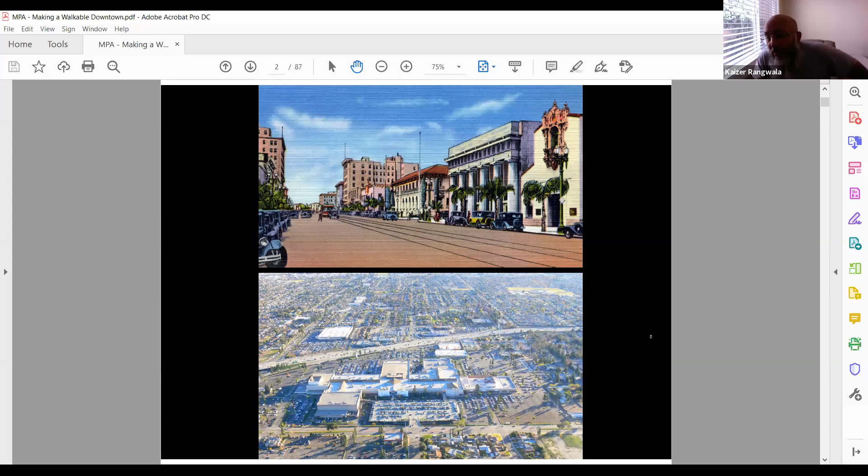Vinayak, can you go full screen so we can see more of the slide? Press Control L. Yeah, sure. Sorry about that. Is that better? Yeah, much better. Thank you. Okay, so sorry about that.

So, the choice of the downtown is really a privilege we all have, because the slide at the top reminds us that the great urbanist legacy that we've inherited is really one where there was just a simple logic of prioritizing 2 feet over 4 wheels. Not that 4 wheels were absent, but the 2 feet were just given more priority.

You can see this is a slide of old Pasadena in the 1920s, where there was a streetcar in the middle. People are crossing the street very, very comfortably. The street has parking on the side. The buildings are lining the street. All across the United States, there was a great tradition of these downtowns.

And systematically, legally, through policy, they were dismantled and replaced by the slide you see below, which is an exaggerated version, of course, but nonetheless a provocative one that reminds you how we transformed this paradigm to focus on cars, to focus on toxic landscapes that interiorized people into gigantic buildings, that inundated the landscape with hardscape for parking.

They were unsustainable because water couldn't percolate into the aquifer anymore, and created all kinds of unforeseen consequences whose effects we now know 60 years down the line. So there's no reason to belabor this point, but I think the essential point I'm trying to make is the choice of the character, quality, and performance of a downtown is a choice we truly have.

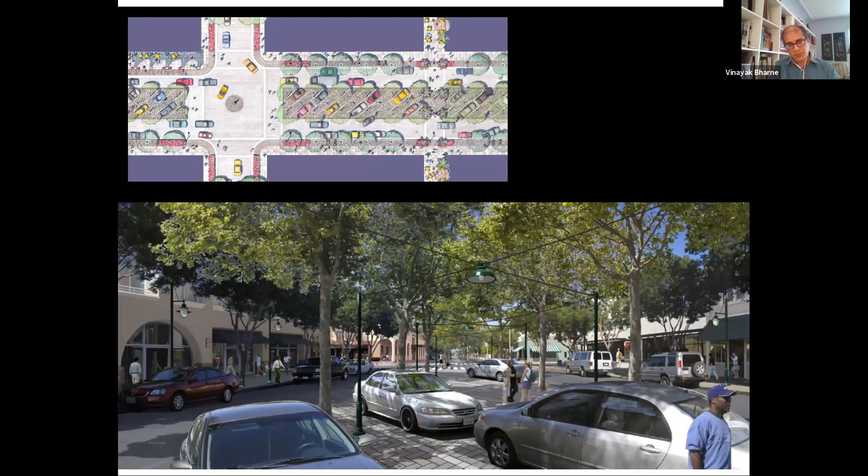We took the central 2 lanes of traffic, central 3 lanes actually, and paved it with pervious paving. We kept a 12-foot travel lane next to it on both sides, but instead of making the central zone purely a pedestrian zone, we actually striped it for parking, which could be parked on a normal day this way. We planted trees because it's an arid environment. You already have this condition in your median and the sidewalks.

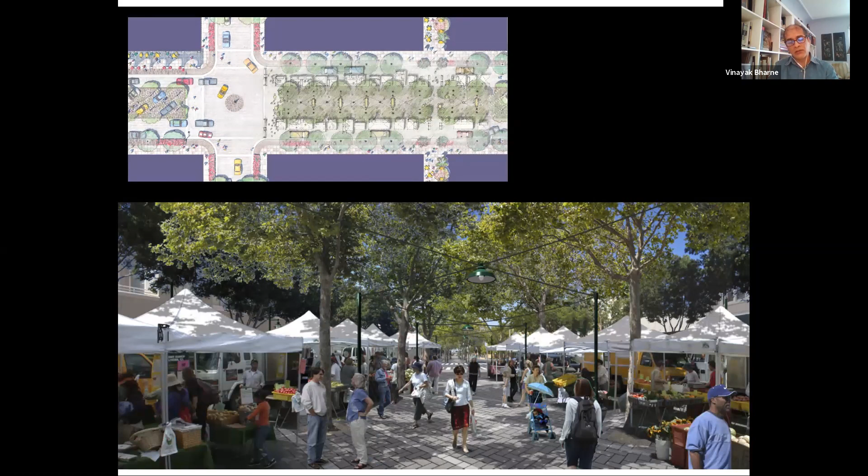But the beauty of this, the main point I'm making is streets are not permanent entities. The most beautiful way of designing public realms is to make them flexible entities. So while this is a normal day where the middle portion is used for parking, you can just as easily close it on a Thursday or a weekend and make it a fantastic farmer's market. This doesn't have to happen along the mile-long entire length. You could take 2 or 3 blocks and close it because there are other streets on that day to take the cars around.

The beautiful thing about this project is within 8 months since Dave Schneider, our landscape architect, finished the construction documents, the city constructed this. It's an 8-block long street, took about 1 block per month. We can talk about the budget, etc. if you have any questions. You can see the double row of trees, young trees here.

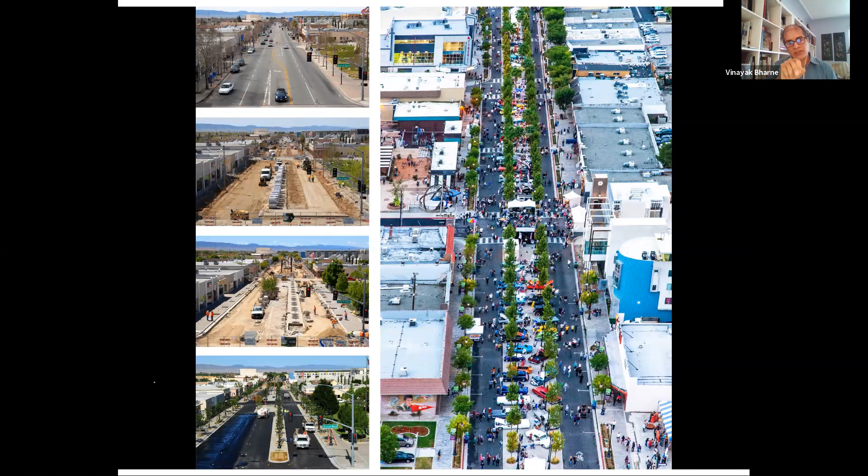And the beautiful thing about this project is by the time it was finished, in 3 years, this had become such an important destination in the city that it attracted $300 million of economic investment in the form of development. So what looked like a sort of a disinvested downtown in the slide to the top left now became a very vibrant downtown. The city celebrated its first Christmas parade in the heart of this project by shutting down the street. This is Christmas 2010, and this is the farmer's market that happens every Thursday.

So the point of showing you this project is taking over your public realm and recasting your public realm through mobility improvements, balancing pedestrians and vehicles, bringing in new development that is responsible to the public realm. Note how these buildings make street faces that are continuous, creates a destination that is like an extended park. This is what I was saying yesterday evening. This is the idea of streets as extended parks. This is not a place for vehicles alone. This is a place for people to hang out.

And the result is economic prosperity. People want to live in places like this. They attract good development. You write the right rules, you bring in the right development, you shepherd the making of 1 or 2 places in your city, and the entire prosperity index in terms of the sociability and the daily life of your city entirely has potential to change.

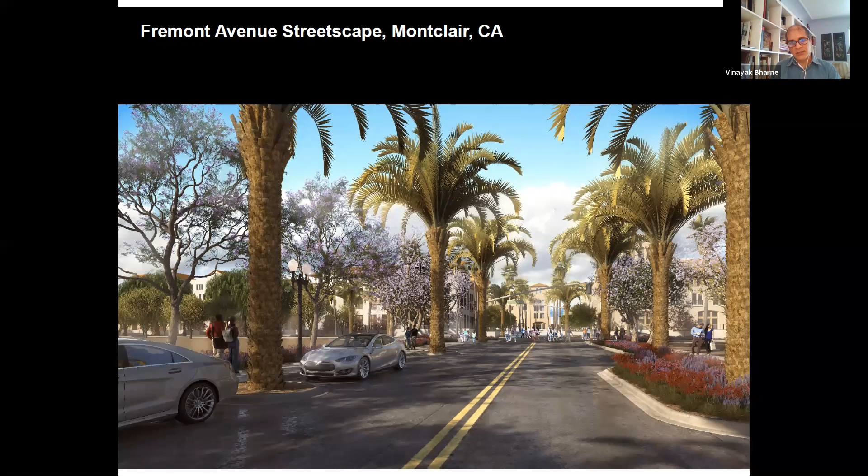So the main point here is to note, and our landscape architect will talk about this today and tomorrow, the choice of trees is an architectural question in itself. Just like we have the character of buildings, we have the character of a street. So choosing palms versus foliage trees, choosing vertical trees versus horizontal trees, choosing trees that are perennially blooming versus seasonal, all of these can create aesthetic delights and environmental indexes that are unimaginably beautiful, but simple and logical to implement.

The most dangerous thing about it is this is done through concerted policy. I mean, policy is written in such a way that it tells you what to do, but it doesn't tell you what not to do. So architects, urbanists are allowed to set back buildings from the street 10, 20, 30 feet because there's nothing in the codes that tell them that you cannot have a blank wall.

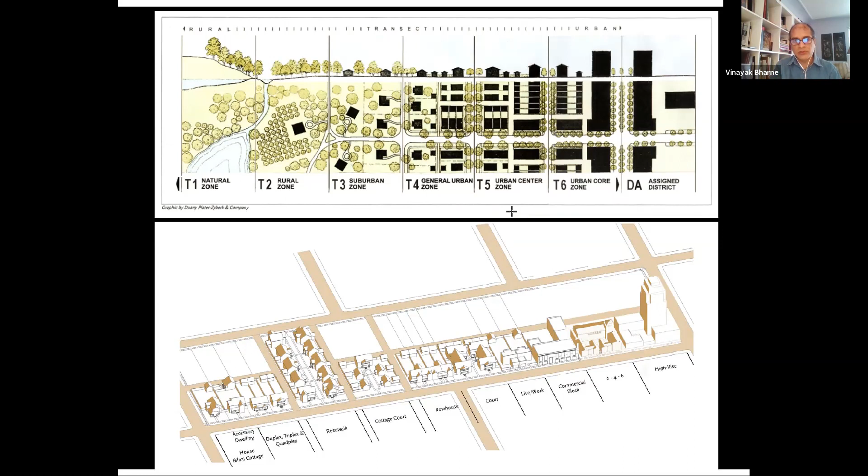So how do you take the enduring qualities of these typologies, the enduring material qualities, architectural qualities, formal qualities, frontage qualities, and amalgamate them with construction realities, code realities, and parking realities? And the projects I'm going to show you are some of the projects we've done in our office over the last 20 years with developers. And this is a tribute to some of these traditional types that we have forgotten. So we begin with single family houses, such as these beautiful cottages. These exist in your city in the neighborhoods.

You have something called mews, which are tiny alleys. For example, there are a lot of alleys that we find in cities that are often considered back spaces, where garbage bins are, but you don't have to look at it only as that. You can actually have garages with units on top of them that look into the alley, that bring security onto the alley, animate the alley, and become places in themselves.

This is an exceptional example because it's a quadruplex. It's 4 units on a single family lot. But if I propose this building next to a single family house in a neighborhood, the neighbor would not shout. The density of a single family house in a neighborhood is 4 dwelling units to the acre. This project is 16 dwelling units to the acre. That's 4 times the density of a single family house. But you would not say a thing because it looks like a single family house from the street. You could never tell that this is 4 times the density.

The secret is something our codes lack, which is the idea of frontage that Kaizer will talk about tomorrow, where simply coding the predictability and the criteria of the interface between the public and the private realm renders a face to the building that makes compatible character, which is a simple logical thing that we can do and we are going to do as part of this specific plan.

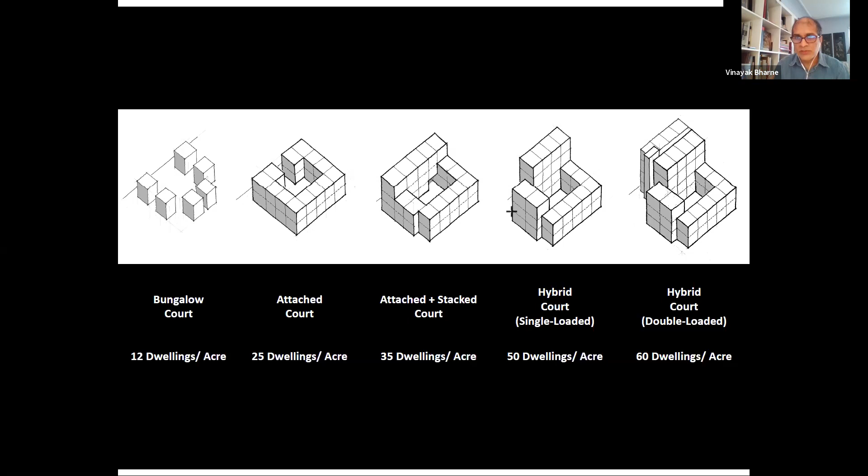So what we have done in our office as we've studied this is we've realized that even if you take a building such as a courtyard type where there's a simple courtyard in the middle and open to sky communal space, that courtyard typology can become dense as it goes from the edge of the downtown to the middle of the downtown. And how do you densify it without losing the quality of the open space, the private open space and the building? And that's what we're going to talk about next.

Another important thing to note is that eventually, while we spend all our communal time and much of our lives in streets and squares, we also buy units from the inside out. So we cannot deny the reality that designing the individual units is also equally important. And this is a reminder that unit diversity is equally important in a market.

For example, an elderly couple or a young bachelor or a young graduate may want to live in a small flat or a loft because that's what they can afford. That's the kind of space they want. On the other hand, people with families who want to have an urban living may want to have a two-story unit where the bedrooms are on top, the living rooms are below. So providing diversity in unit types, not just building types, is equally important.

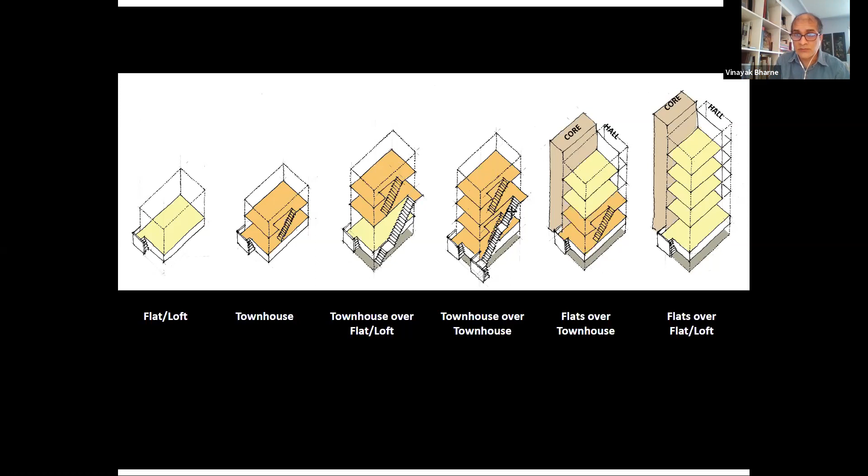One of the important points I'm trying to make here is mainstream construction, or typically business as usual, relentlessly stacks one unit type in a building and packs the heck out of it. And one of the things we are trying to do very astutely is encourage on a strategic level the insertion of new unit types such as lofts, such as townhouses and so on and so forth, both on a horizontal basis and a stacked basis, as you see here, to bring in a diversity of choices for many demographics that can live in your town.

So here are some projects to demonstrate that these are real projects. This is not theory. We have built these projects over the last 20, 30 years. We have worked with developers to make this happen. We have worked with cities to enable them. And we have written codes that come out of these projects. So the codes that Kaizer and we write for these projects do not come through a theoretical discussion. They come from a very deep experience of having done these projects in terms of their practicalities.

So here is a courtyard in Pasadena. I thought we would look at this today because there are portions of your downtown that are directly straddling single family neighborhoods. For example, if you look at downtown to the south of the tracks, right now the blocks to the south of the tracks are all single family neighborhoods. So you cannot pour a 5-story, 4-story building smack next to a single family house. That's not the way to do it. You can put a 4- and 5-story building facing the tracks, but as it transitions into the single family neighborhoods, the densities of the housing need to go down.

So this is a project that reminds you that along the edges of your downtown, it is possible to take lots next to the adjacent single family neighborhoods and densify them, but densify them so that they're 4 or 5 times the density of the single family neighborhood. That becomes a bridge between the denser housing that is going to come on one side and the less dense housing on the other side. This is a bungalow court, a beautiful tradition in Southern California, where individual detached or attached homes were arranged around a simple garden.

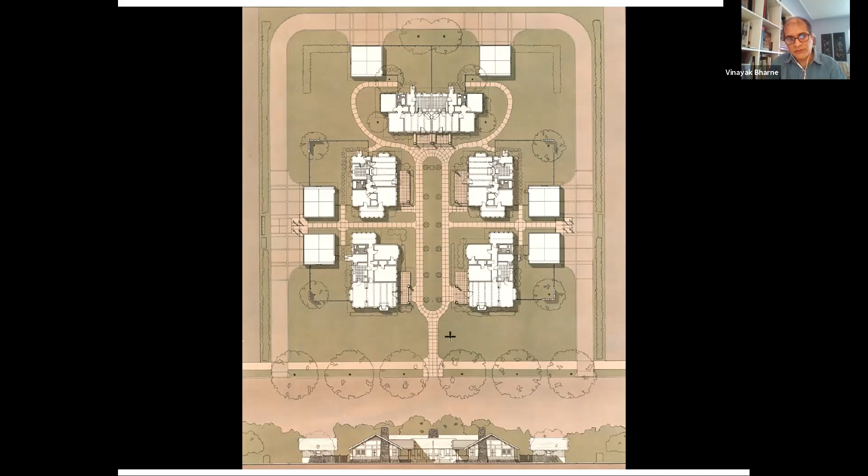Now, the beautiful thing about this project particularly is that all of these houses that you see here were salvaged from old bungalows that were being discarded in Pasadena. And I want to remind you of this, that this is also a beautiful way. There are many beautiful single family homes in your city that are worthy of attention. Rather than disposing them, you can arrange through developers who are interested in this, through incentives and other things, a preservation strategy where you can move these houses.

Many of them are just simple timber construction. You can move them, bring them to another site, assemble them. This is being done in other cities by developers through tax credits, etc. And it becomes a very important way of both encouraging heritage conservation, but also creating typologies that are born out of the multiplication of a single family bungalow.

And you can see here that this project right here, which is 6 times the density of a single family house, sits right next to a single family house. But there's never an issue of compatibility because it looks literally like a series of single family houses from the street. So it doesn't intrude into the essential character and quality of the neighborhood.

As densities rise, 22 dwelling units to the acre, we get into what we call tuck under parking. Tuck under parking is a form of parking where you park under the unit in the small garage, you go into a small lobby, and then you climb the flight of steps and go to your living room above. So it's like a townhouse with its own independent garage below. And this works particularly on narrow lots for multifamily housing.

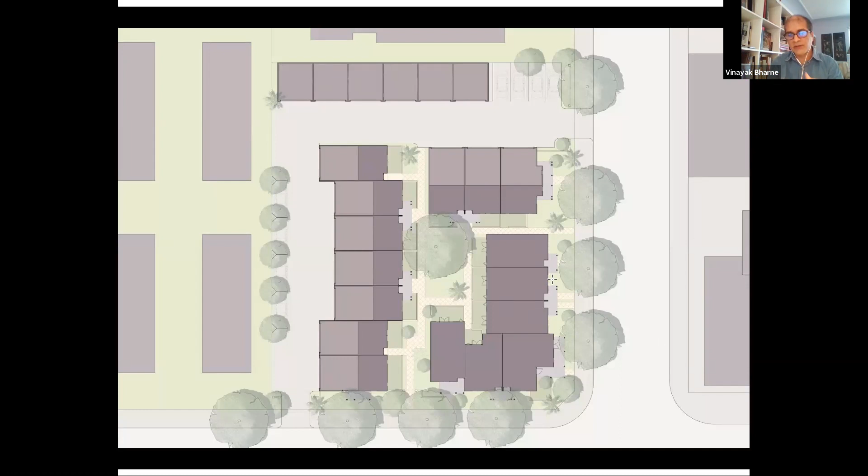The second lesson this project offers is the image of the project. Rather than treating this project like a single building that is massive and long, you can break the image of the project as an aggregate of individual houses. Because it's next to a single family neighborhood, you can use the concept of single family houses brought together. And the moment you do that, even though it is an attached project, it begins to change the image and the character and quality of a project.

So you can see a project like this in a single family neighborhood. It is 22 dwelling units. It's 5 times the density of a single family house. But it still is compatible within a single family neighborhood because of the frontages and the idea that these are a series of individual houses brought together into a project.

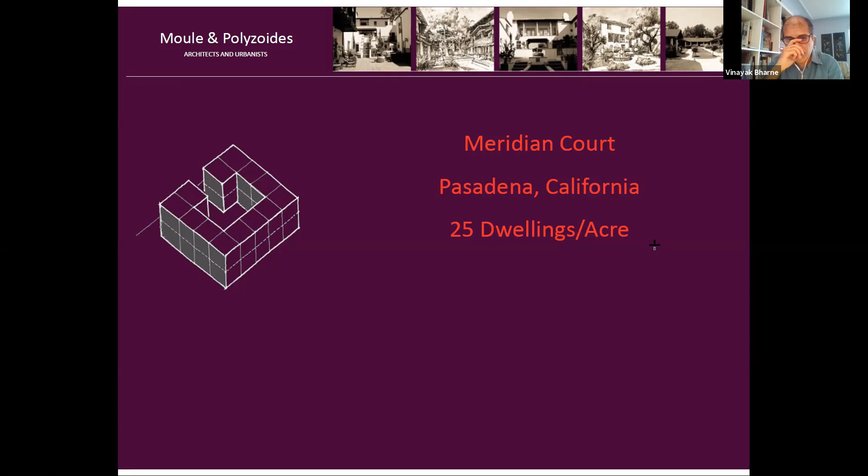At 25 dwelling units to the acre, the surface parking is very difficult to achieve once we cross the threshold of 25 to 30. This is where podium parking, underground parking, semi-underground parking, all these abilities come into play.

Here is a simple 1-court project in Pasadena. Again, a corner site with a simple courtyard right next to a single family house. This is a single family house right here. This is a major street in Pasadena, 2 major streets. Parking is underground because the site has a slope. We can take advantage of the slope and put the parking underground, so it disappears from the street.

And then what you do is you basically take 10 units, which is what the program was here. 1, 2, 3, 4, 5, 6, 7, 8, 9, 10. And you arrange them around a common courtyard. Note that the units that are away from the street have their private patios at the back here. Note that the units that are facing the street have their private patios inside.

So this is a unique unit, which is an L-shaped unit with an office space, making this a work-live unit. So you can sleep here, you can dine here, you can live here, you come out, you work in your office in the morning right there, and you have a common courtyard in the middle. These are more like a townhouse. The living room is here, the bedrooms are here, dining rooms are here, and you have a private patio at the back. And what you share is a beautiful common courtyard that is visible from the street.

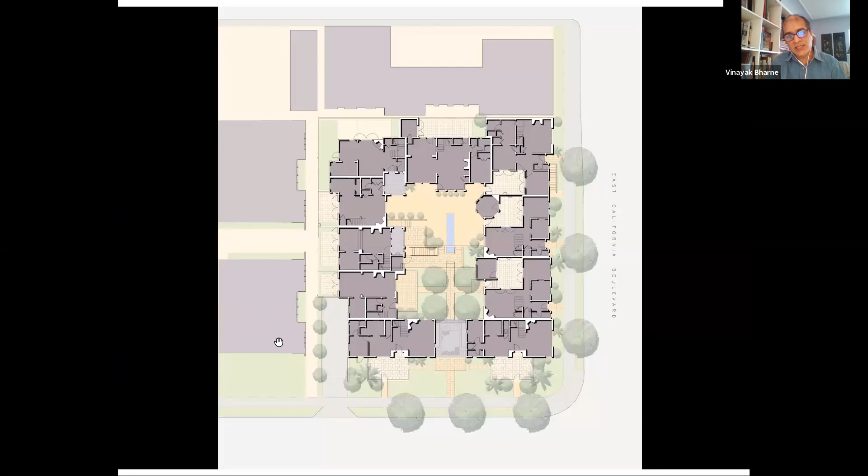And this is a simple house, a simple building that transitions from the single family neighborhood onto a major street. So the reason it is not rendered as a series of single family houses, as I showed you in the last project, is because this is a transitional site. It faces on the one side a major street in Pasadena and a single family house on the other. So the scale of the single family house is respected, but the look of the building changes as it comes to the street because it actually addresses a different urban condition.

This is the courtyard inside. And you can see the simple joy of living around communal rooms. You can bring a chair out, you can do barbecues here, you can have social life with your neighbors, all arranged around a communal open space with private patios for each house.

What we decided to do is eliminate corridors, because corridors have one big disadvantage, whether it's single-loaded corridor or double-loaded corridor. A double-loaded corridor has the disadvantage of not cross-ventilating your units. When you have two units that are facing either sides of a corridor, you enter through the corridor, but your light and air comes from only one side of the unit. A single-loaded corridor allows cross-ventilation, but you have people walking by your living room constantly, so there's very little privacy.

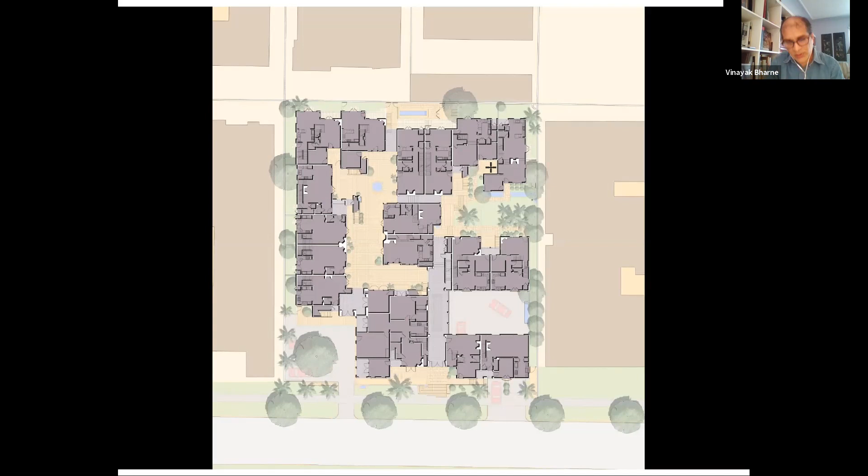So it's a huge incentive for a developer to do this project, because in a typical corridor project, about 18% of your gross to net area cannot be sold. So this is an incentive for talking about these kind of projects and educating developers in your city about the possibility of doing this kind of thing.

And again, they're arranged around courtyards. And the result is now, instead of getting the relentless apartment buildings, such as the photographs that I showed you, you all of a sudden get a series of houses that are brought together in a common language. In this case, it was a Mediterranean style project because the developer wanted it to be this way, inspired by the historic district that surrounds them, which is largely Mediterranean. But this is an absolutely contemporary building with parking below.

Note how the facade is broken into smaller increments. It's not a relentless cookie cutter building. You have a taller mass here, you have a bridge mass here, a smaller mass here. Note that that's a unit, a townhouse unit, that's a flat over a flat, that's another flat over a flat, and that's a townhouse over the garage. So the assembly of complex units, townhouse, flats, and the elimination of corridors, and the rhythmic play of openings, if shepherded during a design process, can yield simple results that can be enduring and wonderful.

You walk through the entrance zaguan, you go through a passage. This is the garage courtyard. And these are the communal courtyards where people gather. So here is a classic example of the courtyard as an outdoor living room that is shared by everyone. There's a fireplace where the people hang out. This is the entrance to the unit at the bottom level, and a staircase that leads you to the unit on the upper level. So you eliminated every single corridor. Everything you see here is a balcony for that unit. Simple 2-story building at densities of 35 DUs per acre.

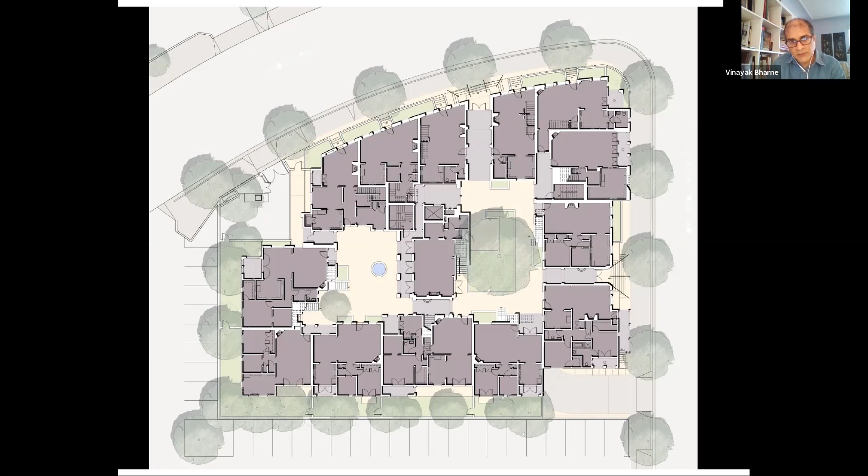And as the building goes up, now this is the most important thing to note. This is the ground floor plan. If you look at the second floor plan, it looks almost the same. But when you look at the third floor plan, you can see what is really going on here. This is the difference between mainstream housing and what we're trying to do. Mainstream housing, the third floor plan would look exactly like the second floor plan. It's a cookie cutter building that maximizes the FAR.

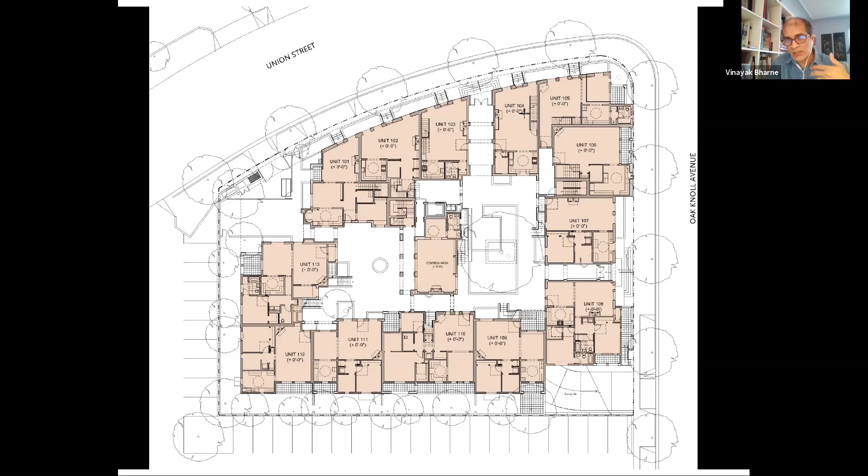What we're trying to do in this case is, because there's no FAR, because the code says, you know, we'll give you height incentives, but it's not about making a relentless building. You sculpt the third floor and raise the height only on a principal street, so that the lower massing here is only 2 stories facing the neighborhoods to the back. So how you mass a building has a lot to do with how you see the context and how you respond to it.

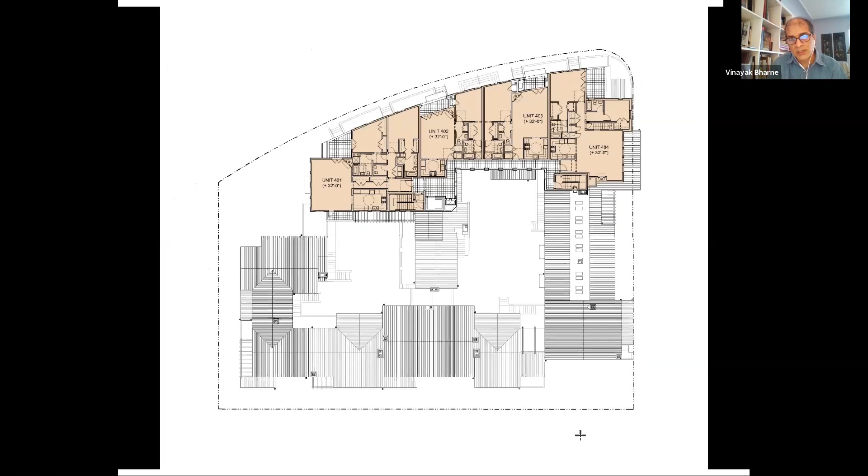Very simple architecture. There's nothing special about this, but it takes incredible care to make sure that the interface, just as you want buildings to make a public realm, you want buildings inside a courtyard to make a private realm. How the entrances to the units are, where they are, what the landscape is, is of the essence in projects like this.

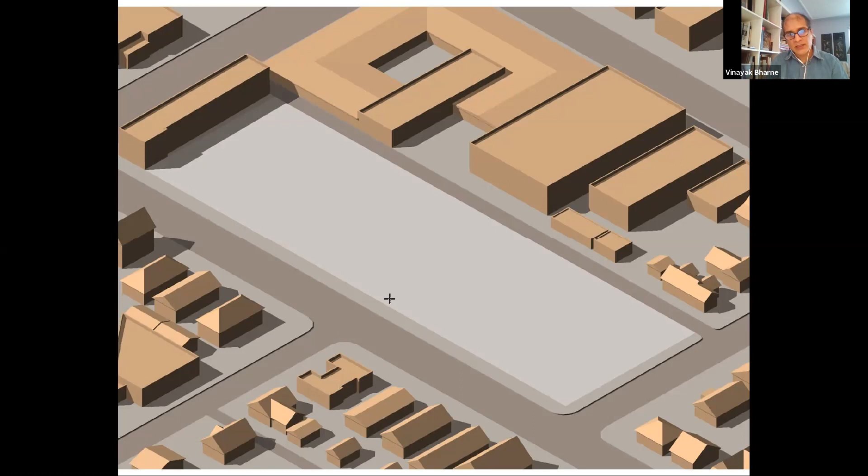So the way we talked about it is, here is the site, and in a conventional business as usual development, this is the kind of project that you would get, which is a developer comes and basically designs one project and multiplies it 3 times relentlessly on the site within the ice box, which is the FAR envelope. So the gray ice box that you see is the maximum height limit of the project. So say it is 35 feet.

So he takes the 35 feet and packs it with as much as he can get with no respect for difference between here and here. The important thing is you can take the same FAR envelope, you can take the same height envelope and design a project that is like this. Now, what is the difference between this and this?

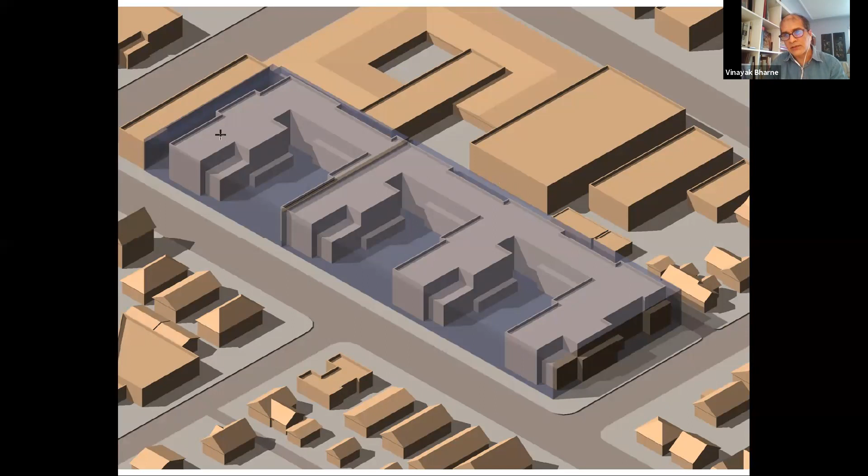This is a project that we call cookie cutter. It basically says, I don't care if there is a single family house here, I'm going to design the same building here as there. This project says that's not what we're going to do. We're going to take the densest part of the project and put it here.

We're going to put a middle density here at the back, and then all along the front of this street and this street, we're going to make duplexes and single family houses that respect what is going on around here. So if a neighbor comes out of his historic house here or here, they're not going to see a blank wall or something as relentless as this. They're actually going to see something that was always there to begin with, which is single family porches and fabric.

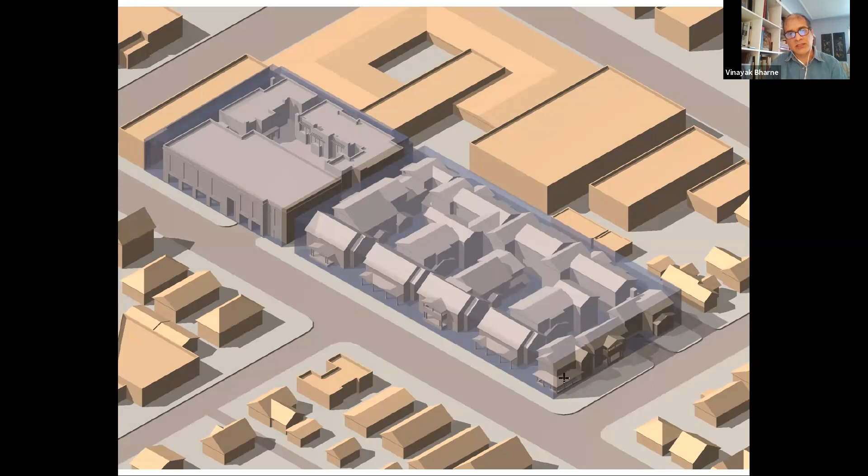And you can do the same thing within the same height limit, within the same FAR envelope. This is the irony of this science, that you don't have to change any of the rules. You can achieve the same densities within the zoning code, just by recalibrating how you look at the context. So this is the diagram that shows you that instead of having the same color on the entire site, you have a dense color, a less dense color at the back of the site, and in the front of the site, the least dense color, which addresses the single family homes.

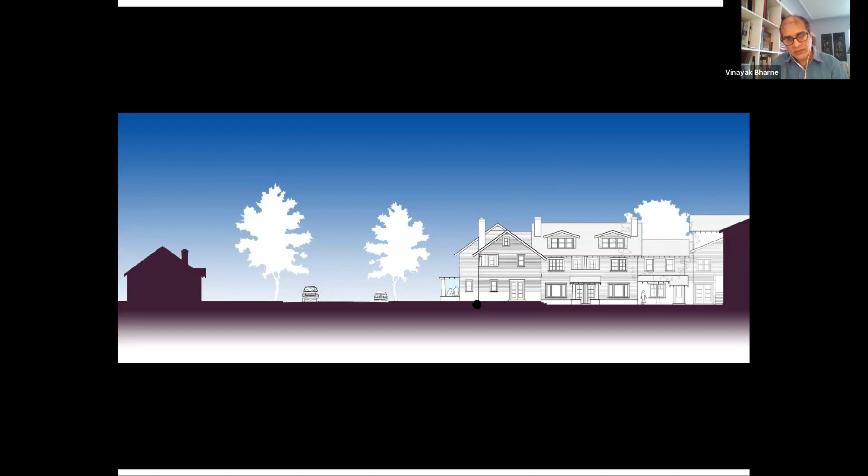And this is the second lesson, that all it really relies on is to put the higher density at the back and create frontage conditions that are compatible with what is around you. So this is where Kaizer will be writing a very sophisticated code, because if we can respect the scale, the character, through frontage conditions that make compatible urbanism between the two sides of a street, we can pretty much do whatever we want behind it, which will not disturb what is going on here.

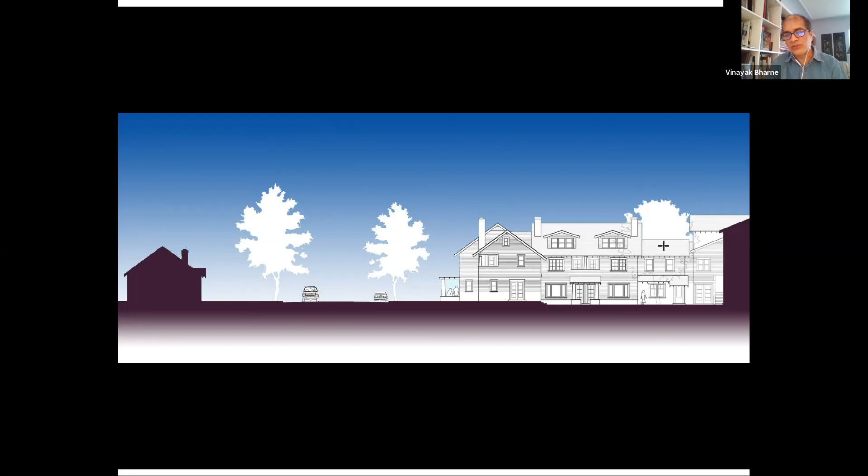And the result is a diverse project which has an industrial style building, which respects the existing buildings in the downtown. And the rest of the project is a craftsman style project that you see along the rest of the street. And Kaizer and I did a charrette. We did a specific plan 2-3 years ago for South Pasadena, and the project you just saw is right here. So you can see how projects like this are now beginning to spawn other ways of thinking about the larger places. This is literally the downtown of South Pasadena, not unlike yours, and begin to insert new single-family, new multifamily density to complete the vacant parcels within the downtown area.

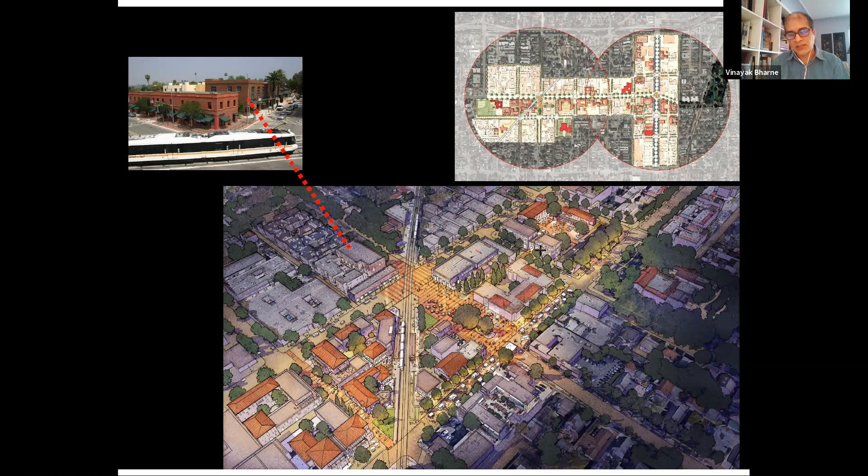And it's a dense project that is actually 2 and 3 stories at the back, but along the front, it is done in a craftsman style frontage that begins to revive the neighborhood character that disappeared from that neighborhood. So the moment you now begin to craft an incredibly important and intricate street front, you can take an affordable project and really make it as beautiful as any other project can be.